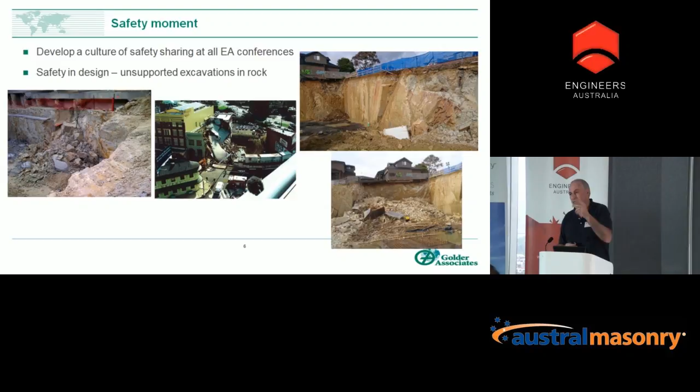So I have to sit here. I prefer to walk around, but I have to sit here because we've got the camera filming. So just forgive me if I get a little bit boring just sitting in the one spot.

The retaining walls are a means of permanently steepening batters, often from something which is stable to something which is unstable. They create a void which things can fall into. Therefore, they form one of the riskiest things we do.

Unlike tunnels, we don't give retaining walls quite often the attention they need. With tunnels, we do a lot of work - it's an open excavation in the ground, there's a lot of engineering. Retaining walls, for some reason, we don't give the same attention, and yet they've got the same risk of failure.

When we design retaining walls, many engineers apply generic soil properties and formulas straight from the codes or straight from a textbook. They don't really think through whether they're applicable to the situation they are in. So I'm asking you to move away from that aspect and start thinking about the ground conditions you're doing the retaining wall for, and what truly are the properties which affect the wall.

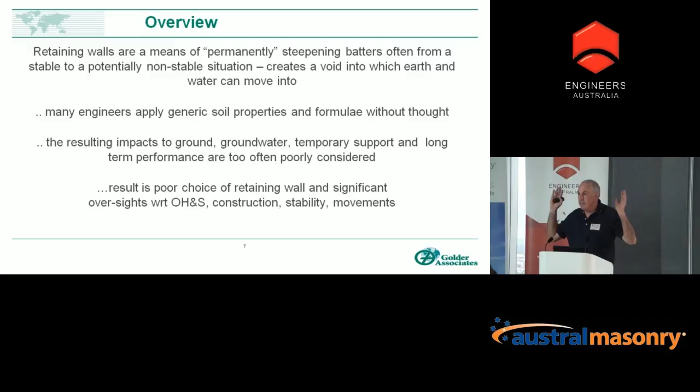When we do a retaining wall, it impacts on the groundwater. We have to think about temporary support and long-term performance. If we don't do this, the retaining wall will not perform for the long term. Most retaining walls are put in to last a lifetime - how many actually last a lifetime? Most of them move, most are under-designed to some extent because we underestimate the ground.

If we don't consider these things properly, we often choose the wrong type of retaining wall. And in doing so, we can often have significant oversights with respect to occupational health and safety, construction in a practical sense, stability, and what movements can be caused.

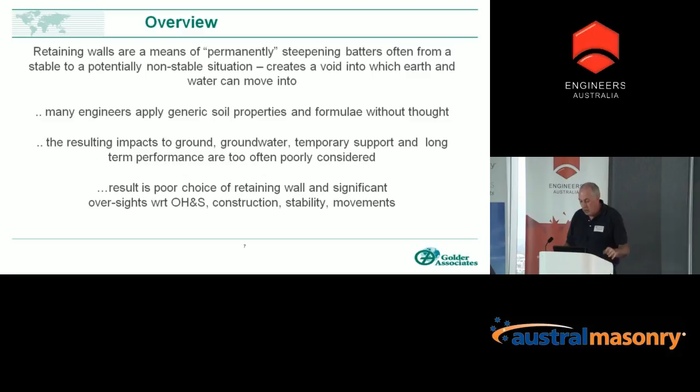One thing we must remember is a retaining wall is much more than a fascia. A retaining wall is not spraying shotcrete up against a wall and hoping it stays there. A retaining wall is a structure which has to support loads which we need to calculate. It's no good just relying on suction in the ground to hold the retaining wall up.

If you're going to design a retaining wall, you need to think about what you are going to do to the ground. If you're going to excavate into a slope for a basement or dig down for a basement, you're going to unload the ground. The ground, when it unloads, has completely different properties than when it loads. Do you consider those? If we fill from an embankment, we're applying load to the ground, so it's a completely different stress path again. So we need to think about the properties we're going to need to simulate the loading case, especially when putting embankments on soft materials.

Both of these applications result in stable ground movements - hopefully they're only stable ground movements - or they can result in failure, which are unstable ground movements. Both of these are considered failure. If you have too much ground movement, or you have failure in an ultimate limit state sense, they are both failures of the retaining wall. It doesn't have to collapse.

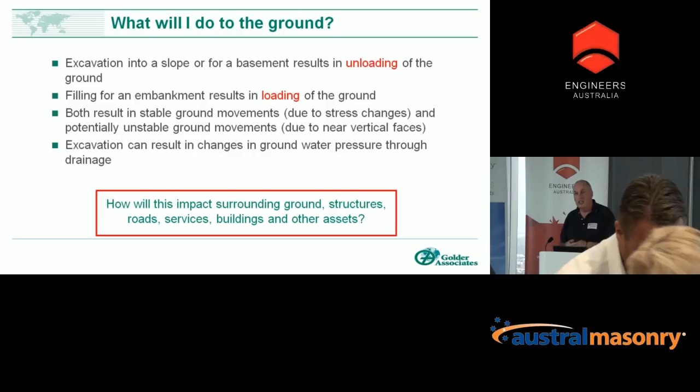The other thing we have to remember is generally excavation can result in a change in the groundwater regime. And as I'll come to later, groundwater is one of the most important aspects of everything we do. I probably wouldn't have a job if it wasn't for groundwater, because our engineering or our task would be so much simpler. And how often do we think about groundwater properly? So I really urge you to...

When we build a retaining wall, how will it impact on the surrounding ground? How will it impact on structures, roads, services, buildings and other assets? And can we build it safely?

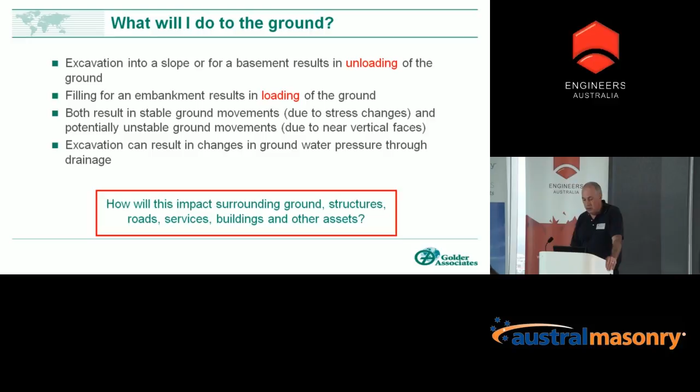So let's just relook at how the ground will respond. You could get wall failure if you don't build it properly. You could get excessive settlement of both the wall and behind the wall. You can get excessive horizontal movement. You can change the groundwater regime. You could get possible piping and liquefaction.

We also have to think about if we're doing an excavation and putting a retention system in the ground and it's got a higher groundwater table - if we lower that groundwater table, that can have ramifications for a long, long way. Especially if you've got an aquifer or something below your retention system, because you're lowering the groundwater pressure, that can affect areas for kilometres around. And we know that only too well in Melbourne - it's happened too many times.

So most of you will know all this. So what do we need to consider?

You obviously need to consider the height of the retained soil, the strength of the ground, the compressibility and stiffness of the ground. How many of you actually think about that? Because that controls movements.

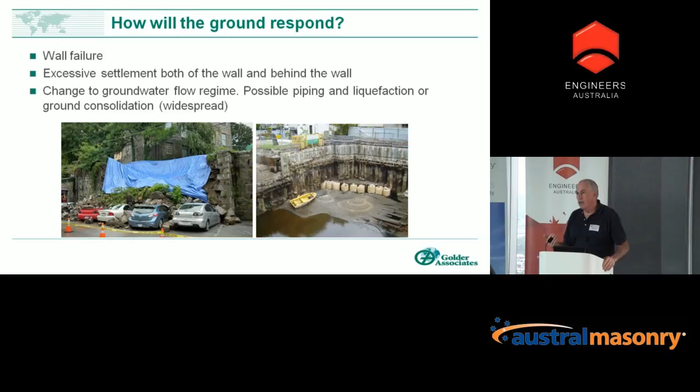The material you're supporting by the retaining wall is engineered fill. So it's got properties which are select for a start, which are reasonably consistent, and you're engineering the product. So, hopefully if you use the right material, the backfill will not change with time.

Groundwater is usually not an issue because you're above the groundwater. Excavations, on the other hand, are much more risky. They're misunderstood and abused simply because too many people rely on suction to hold retaining walls up.

I'll come back to this in a minute. The wall is supporting structure which replaces the ground. So in some stage you may need temporary support until you get that permanent retention structure in, and you need to think about what that temporary support will be.

It's a relatively high-risk construction. Most of the retaining wall failures you will see are from excavation.

The material you're supporting is natural. It's unengineered material. Quite often you don't even know what it is, because how often do you drill a borehole behind the retaining wall? It's usually within the site, not exterior to the site.

So you might not even know what it is. You have to use geology to guess what that material is. Hopefully better than guess, you use logic. And the properties can change with time.

The groundwater is often a major issue because we're digging down into the groundwater system, and you might need to consider such things as water tightness, drainage, discharge.

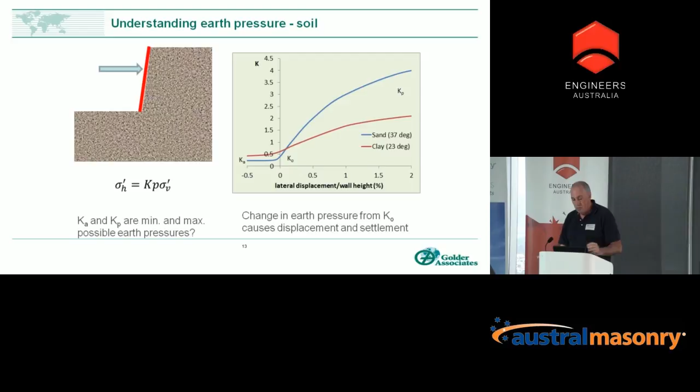Let's have a little bit more look at K0, the pressure at rest. Why is K0 important? Because when I dig a hole, the K0 is what is relieved. In a simplistic case, if you take K0 divided by the modulus of the material in the zone which is moving, you can work out how far the wall is going to move. If we don't know what K0 is, we can't work out displacements.

K0 is not an engineering property. It depends on stress history, geometry, reactivity, and so on. So we have to try and make an estimate of it. We know it has to lie between Ka and Kp.

You're all thinking, but there's those equations relating phi and K0. They are for normally consolidated material, not for over-consolidated materials like we're generally dealing with in these conditions. We can estimate Ka and Kp reasonably accurately for soil, but it's a bit difficult in rock.

When you estimate Ka, it depends on your strength parameters, mainly friction. How many of you actually go out and measure the friction of a soil? And when you do it, how do you do it? There's been so many cases I've seen people use quick undrained tests to measure the friction angle of a soil.

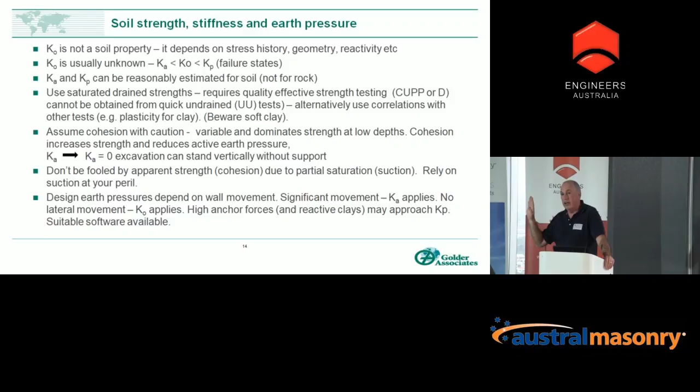If you apply very high active restraint through ground anchors or something to a retaining wall, you could push it up towards Kp. I've seen cases where people worried about ground movement in soft clay set a value of 12H as the earth pressure. 12H in a soft clay, you will fail the clay going the other way. You will actually heave the structure next to you. So in being conservative, you're actually doing damage.

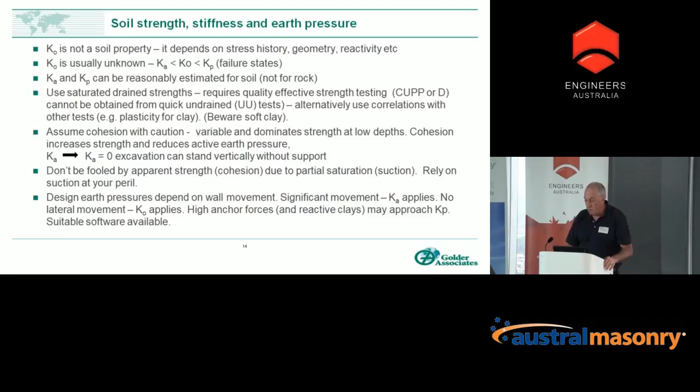So you need to get the horizontal stress about right. And it's a guess—an engineered guess, based on a lot of analysis and so on.

There are two different types of systems. I'm going to talk about passive systems and active systems. A passive system is basically where the retaining wall just sits there and reacts due to weight or some other mechanism. These systems all develop their resistance through displacement, and they will all have displacement equivalent to the loss of in-situ stress, from K0 to Ka.

When we design them, we generally design them for stability only, and we generally design them to resist Ka. You have to be very careful about swelling soils. If you put a retaining wall in swelling soils and the soil wets up, it's going to push the retaining wall. But the maximum force can only be up to the passive resistance or the swelling pressure, and the swelling pressure is usually less than the passive resistance.

You should not use such retaining walls when you're close to sensitive structures, assets or buildings, because you will get movement and can damage them. They are great for embankments, but if you have an excavation, you require a temporary excavation—I'll come back to this in a minute.

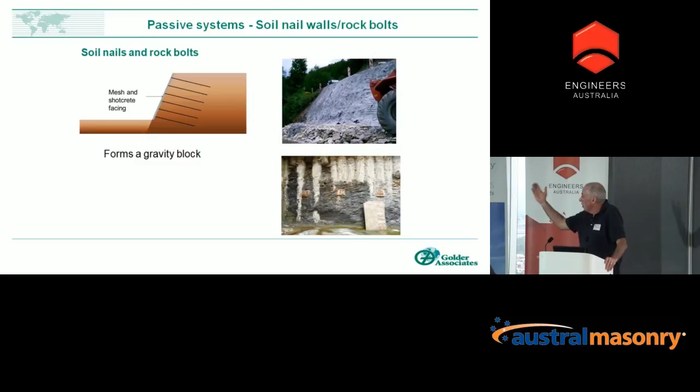Gravity walls you know how to design. You've basically got that block—this is very schematic, as someone picked me up on the other night. You've got an active earth pressure, and you've got base friction generated by the weight of the retaining wall, and you have to resist sliding, overturning, bearing capacity, and structural capacity of the wall.

In doing so, as a rule of thumb, you probably need the width of the base of the retaining wall to be 50 to 60% of the height. You can reduce that down, but you have to design it accordingly. So if you see a really skinny gravity retaining wall, you need to investigate it further.

Quite often the global stability is completely ignored—you need to do a global stability check.

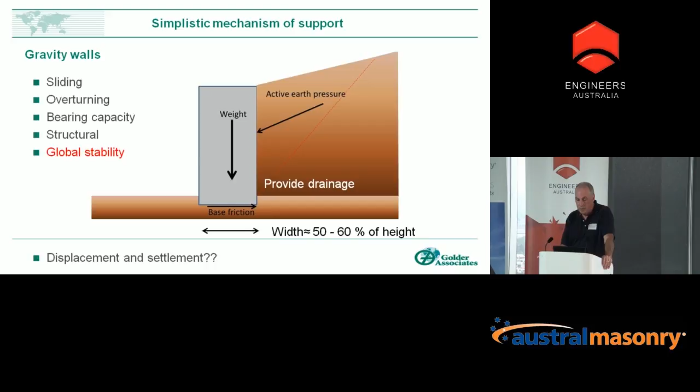Another passive system is the cantilever, non-embedded cantilever wall, which you can use where displacements are not of concern, because you basically have to excavate before you put the wall in. When we go to embedded systems, you put the wall in before you excavate.

But I want to question something. If you look carefully at the photograph on the left, you'll see a worker between that cantilever wall and the excavation. I question the safety of that, and it's time we stamp that type of thing out. Also, there's a house immediately next to that two metre cut—that house would have moved. If that was your house, would you be happy with it? I wouldn't be. So let's stop doing that type of thing.

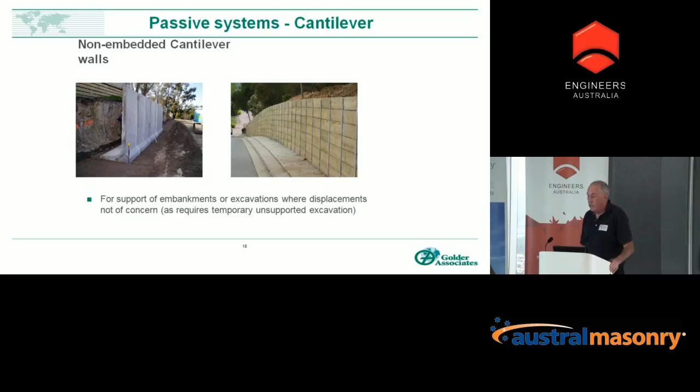Provide the right type of retaining wall for the right position. Embedded cantilever walls are the next system—we put these in before we do the excavation, and then you can excavate down. Obviously, these are full depth.

Some examples shown here are sheet pile walls, and soldier pile walls, where you've got piles at spacing and then shotcrete lagging, which you put in as you go down, but the piles are put in first and provide the main support. As you go into more permeable ground conditions with high groundwater tables, you start talking about secant piles, but the depth to which you can install secant piles depends on the piling method, the ground conditions, and what finish you want, so you need to consider it carefully.

Then you've got the diaphragm wall, which is probably the best type of wall but the most expensive for permeable ground conditions. There are other methods you can use to get the piles in, approaching something like a secant pile wall, but I don't have time to go into that tonight.

The whole idea of these walls is you put them in before you excavate, then excavate, providing protection to the workers and some protection against movement to the services and structures behind. You have to design for it, because these move a fair bit—they're quite flexible, and the pressures are generally close to Ka.

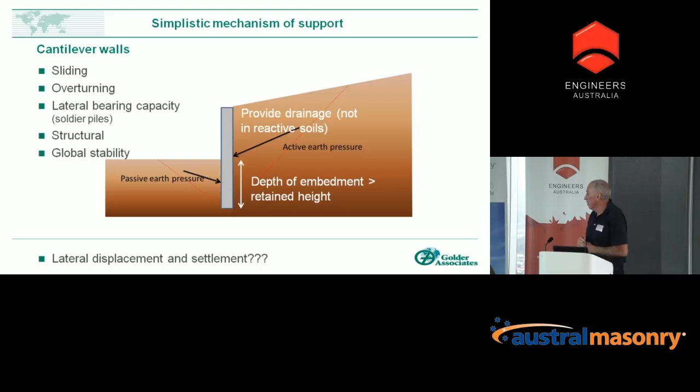Then we move into a whole new system of retaining walls, active retaining walls, where we are actually trying to stop the retaining wall from moving. We do this by using props or anchors generally. We insert the retaining wall into the ground before you excavate, and then as you excavate down, you either put the prop in or you post-tension anchors.

The stability and movement are both important, and you have to design these to limit ground movement. You need to do finite element analysis of these, and you cannot use the AS 4678 Earth Retaining Structures Code. It is not applicable to these walls. You cannot use limit state design for these walls. You have to do your best estimate of the ground properties, and from that get working stresses, working reactions in the piles and so on, and then factor those.

There are some very good publications from CIRIA which deal with this type of thing, but they are all limit state. So be aware that you should not be factoring down properties or factoring up weights or earth pressures or anything else for embedded active retaining walls. It doesn't work. You'll get completely the wrong answer.

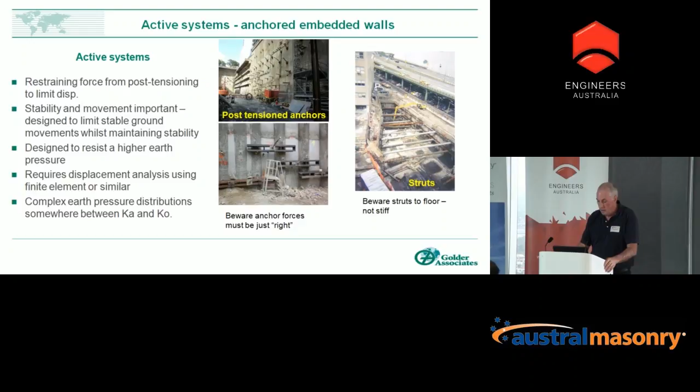And this is much the same type of thing. You still consider the same type of thing. Don't be fooled just because you go and do a finite element analysis. You still need to check individual pile capacity if you're on a soldier pile wall, that the toe doesn't kick out or things like that. You still need to check those things. Just don't believe everything the finite element analysis gives you. There are other aspects you need to check.

One of the things you need to check is the bearing capacity, because you've got anchor forces which are inclined and they're pulling the pile down. I have seen retaining walls fail because they've been pulled into the ground by the anchor forces, they haven't had enough bearing capacity, and that causes the wall to move out.

You've also got to think very carefully about the connection of the anchors to the wall, because if that connection can move, the wall will move out. You need to think about every aspect. Don't let the little details go past without investigating.

We are generally very bad in Australia with respect to anchors. I personally don't think we put them in properly. We don't test them properly. We don't do our QA properly. The most important aspect of this system is the anchors. We need to do better.

So for the structural engineers out there who are doing the drawings, there are very good recommendations within the earth retaining structures guidance about anchors. Enforce them. Make the QA be done. Make the testing be done.

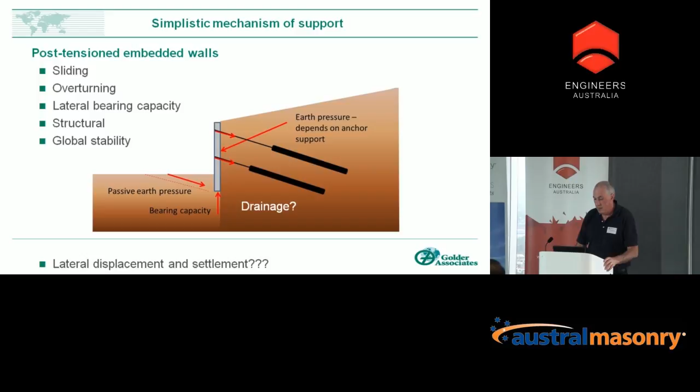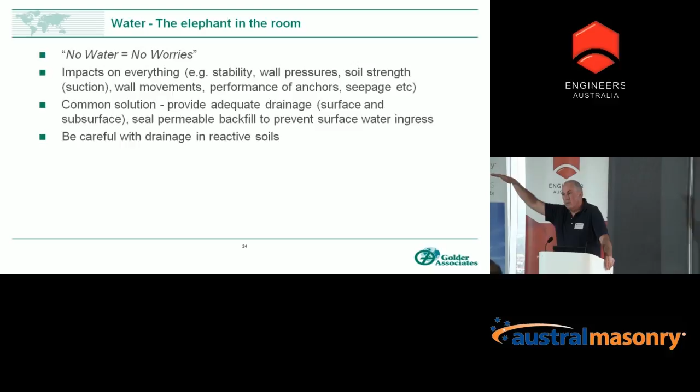Water impacts on everything: the stability, the wall pressures, the soil strengths, the wall movements, the performance of the anchors. If you've got anchors in sand and you get a groundwater level rise because of, say, a broken water main nearby, you halve the strength of the anchor, and therefore the wall moves out.

Do you consider that in design? If you're doing a retaining wall next to a 100-year-old water main, do you think about the possibility that the water main could fail? And should we? Should we consider it a serviceability state or ultimate limit state? Things to think about.

Common solutions are to provide adequate drainage to get rid of the water. How long does that drainage last? How do you design for it? Do you need to provide a system to clean it out?

When you've got a clay material, not much water is going to come through, it's more a pressure relief situation. When you've got sand and flowing water, you need to tank it because you can't deal with the water coming through. When you've got intermediate situations, like weathered fractured rock with water coming along seams, you might have a reasonable amount of water inflow, so you might have to maintain your drainage structure.

What about reactive clays? How many people doing retaining walls in reactive clays put a gravel backfill behind it to act as drainage? Mind you, you're not going to get any water out of the reactive clay because its high plasticity holds it. All you're going to do is introduce water into the ground from the surface, and that's going to cause problems to your retaining wall. So if you're going to do that, you need to seal the top so water can't get in. I've seen houses blown apart by it because of water getting in.

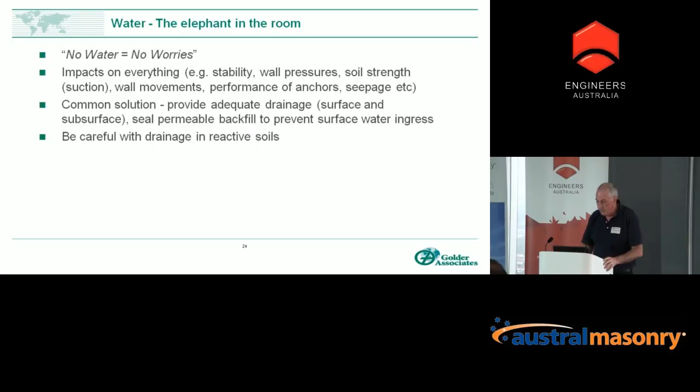So in summary, retention of fill embankments are well suited to passive systems because they're generally away from things. We need to be wary of bearing capacity problems, especially in soft clay. If you put a toe of an embankment next to a service which is in soft clay, you can very easily break that service.

They generally have stable lateral movements, but they're reasonably high, though not usually a concern unless you're close to an existing structure. You must use appropriate backfill materials for the application of the wall, and be aware that you can undercompact it or overcompact it, with ramifications on the behaviour of the wall.

You don't want to be jacking your wall out because you're compacting the hell out of it, or overloading straps in a reinforced wall because you're compacting too hard and overstress your straps. So you've got to be careful. Provide adequate drainage, both surface and subsurface. Bearing capacity, Selma already talked about. And don't forget global stability.

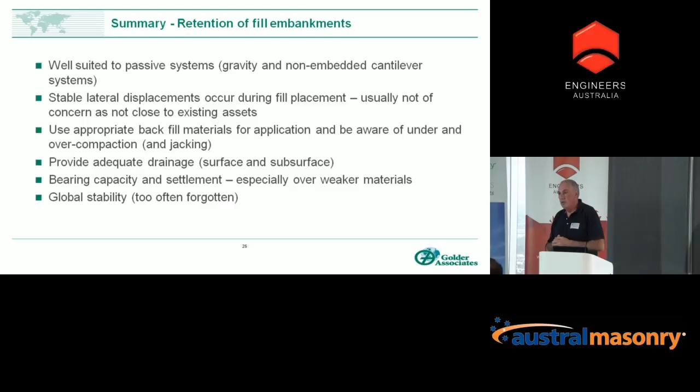Just be aware of how often, as geotechnical engineers, we're asked to do a road widening or railway access widening, cutting into a slope. When you look at the stability of the slope, it's only got a factor of safety, maybe 1.2, and then they ask you to guarantee that the retaining structure has a factor of safety of 1.5. How can you do that if the whole slope has only got a factor of safety of 1.2? So you need to be aware of that, because if the whole slope fails, it's going to take your retaining wall with it.

For excavations, gravity walls, non-embedded cantilever walls, and tilt-up panels, they all require bulk excavation prior to the work. Because you do that, you're going to get potentially unacceptable lateral movements and settlements within the zone of influence. So they are not suited in urban areas where we've got lots of assets around.

The temporary batters are abused. These are general recommendations which most geotechs will put in their reports with respect to batters: 1V to 2H in sand, simply because sand will not stand up any steeper; 1V to 1H in clay, where we're relying on suction in the short term for the clay to stand up at that angle, though over a long term you will get failures in that; and greater than 1V to 1H in rock.

Be very careful about rock, from those first examples I showed you. You need to understand what the bedding's doing. We've had some classic examples in Melbourne where there's been bedding at 20 to 25 degrees, but the friction angle on that bedding has been 10 degrees, and the rock has failed. So don't think that flat bedding at 20 to 25 degrees is necessarily safe. You need to think about it.

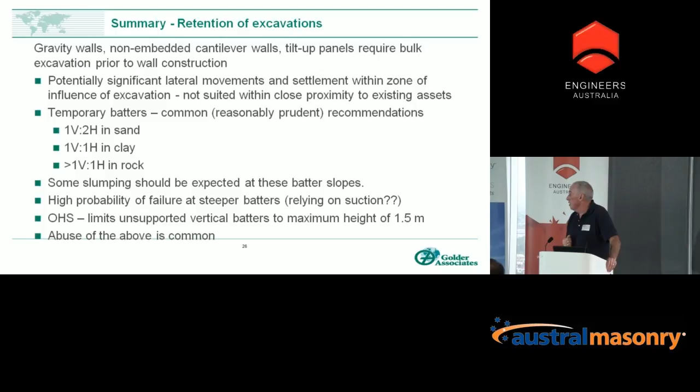At these angles, some slumping should be expected, and you can deal with it as part of the construction. As we get steeper, your probability of failure is going to go up.

Occupational health and safety is important. We're only allowed to stand next to a 1.5 metre deep vertical cut - that's what the Occupational Health and Safety Act says. So how in the hell are you going to build a lot of these retaining walls, which are 10 metres high, with very steep batters? You need to think about it.

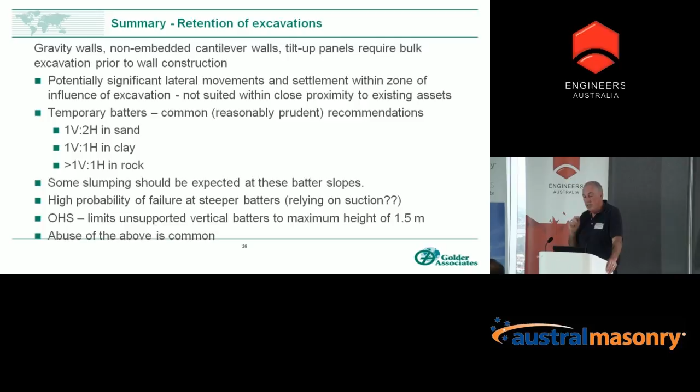So my plea is: when you're doing retaining walls, understand the setting you're in - the geological setting, the hydrological setting, and the urban setting. They're all important. Protect the existing assets at risk. Always check to see what assets are there - you might often not be told.

Choose the correct type of retaining wall and apply prudent engineering. There are a lot of cowboys out there who are willing to take shortcuts. We don't need to be part of those, and I would actually encourage you not to be one of those.

I know we get pressure on us to steepen up batters and so on, but we need to think about safety. It only takes one batter out of 100 to fail and hurt somebody, and you will never ever design a steep batter again, and you'll be in deep trouble.

Excavations and retentions are a risky business. They need to be given due attention. It's not something you give your junior engineers and walk away from - you need to have a review of it.

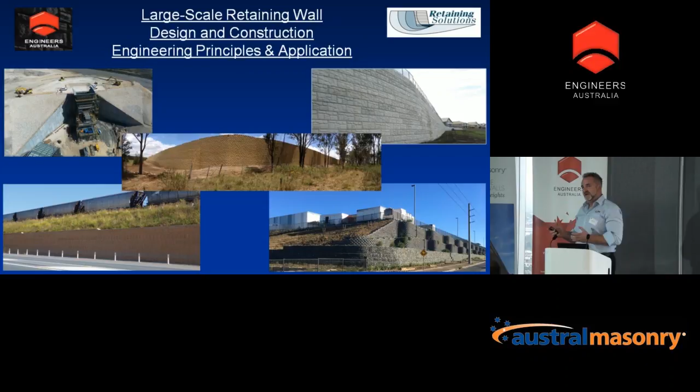The photo shows a few different photos of the types of applications we're talking about. The one on the far left is a mining structure, heavily loaded, typically using reinforced earth panel walls, to a magnum stone wall on the right. In the middle is a traditional keystone frictional connection system. The bottom left is a positive connection system supporting a railway embankment. And there's a hybrid system showing a combination of gabions and keystone in a terraced arrangement to soften up the aesthetic appeal.

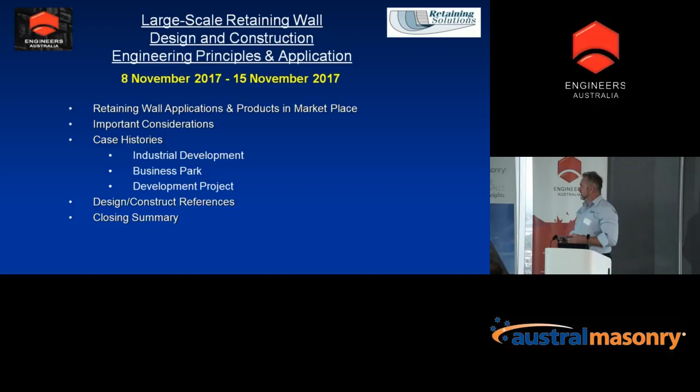So what I'm going to be covering tonight is essentially applications within the marketplace. There's a number of products, and it's becoming more important to be familiar with these products and how they should be used depending on the application, what the actual walls are sitting on, what they're retaining, and most importantly what loads are being applied to that structure over its life. We'll go through important considerations from design through to construction, backfilling processes to look out for, some case issues in terms of industrial development, a business park and development project, some design construct references I've come across which may be useful, and a closing summary.

So the first application is where you're looking at true and piled bridge abutments. We're talking about heavy structures, large structures that can vary from 2 to 30 metres high. Typically you will see panels used in this application, though there are other types of structures. Most importantly, these products are getting loads from 20 to 200 kPa applied on top of these structures, including crash barriers, wheel stops, and quite heavy impact loads.

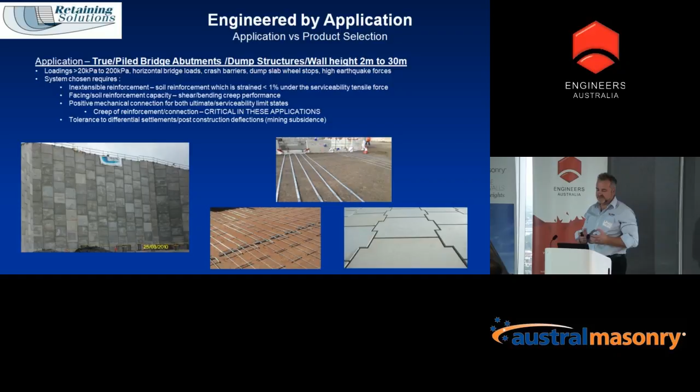You are looking for more of an inextensible reinforcement in this application. You need to look at the combination of that fascia with the soil reinforcement. So typically, what are we talking about with inextensible reinforcement? We're talking about soil reinforcement strained to less than 1% under the serviceability tensile force. You need a high facing in terms of the soil reinforcement capacity as a fascia, how that reinforcement connects to the facing, and how that will perform under heavy and sustained loads - in other words, a positive connection system to that fascia. Creep of the reinforcement is also important in terms of post-construction creep strains.

A lot of these structures move during construction, regardless of whether it's steel reinforcement or geosynthetic reinforcement - they do move, and particularly with regard to tolerances and differential settlement, these are important things that need to be looked at. Road widenings, car park approach ramps up to bridges - again different codes will dictate the type of system you can use in this application. Loadings can be from 5 kPa up to 40 kPa, there may be crash barriers on top, and they can be tied into slab arrangements, taking into account the horizontal force that may be imposed at the top of the wall - important to look at.

Extensible reinforcement typically can be used in this application, from my experience. So again, we're talking about soil reinforcement strained to greater than 1% under the serviceability tensile force. There are a number of different types of facings in the system - you can see there's Vertica, Allanblock, and keystone down the bottom left, along with different types of soil reinforcement. As the engineer, you need to make yourself aware of the types of reinforcement in the marketplace and how they perform over the life of the structure, in terms of temperature effects on the reinforcement depending on the polymer, and also the types of materials you're placing and how that affects that reinforcement long term - and magnum stone down the bottom right in terms of a frictional connection.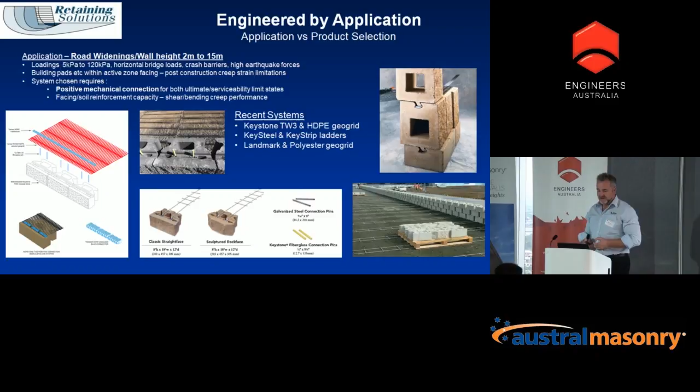There's a lot of different geogrids out there, so you need to ask the right information from those suppliers. Do they have those connection strength curves? When you are looking at alternative systems that come across your desk, you need to make sure they are equivalent, not just in terms of the long-term design strength of the reinforcement, but also how that reinforcement will behave with that facing over time. So that connection strength is particularly important. You need to look into the supplier data sheets to make sure you've got the right information on how it behaves with that facing.

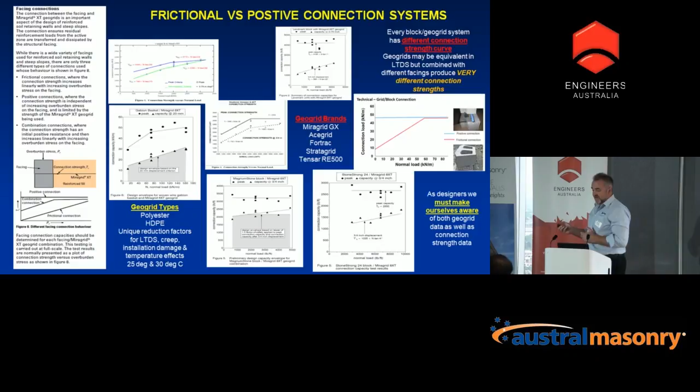Gravity walls - Chris has touched on conventional gravity walls. Again, they're quite familiar with the traditional methods, so crib walls, gabion walls, masonry no-fines concrete walls. There's mass block, lock block, traditional reinforced concrete blockwork walls. New systems we will touch on tonight are magnum stone with extenders - we'll talk about the benefits of that in terms of potential cost savings - stone strong, and post and panel walls, traditional steel I-beams or columns with concrete panels in between, satisfying durability requirements, which is the new inception of that type of product into this application.

You need to be very careful though on the subgrade conditions in which you're designing and building those types of walls. Again, it shows you the traditional gravity wall using concrete or a concrete crib wall, and also using gravity walls in terms of gabions. They need to be laced together the right way and designed as a gravity structure, not as a skin. It's not a fascia.

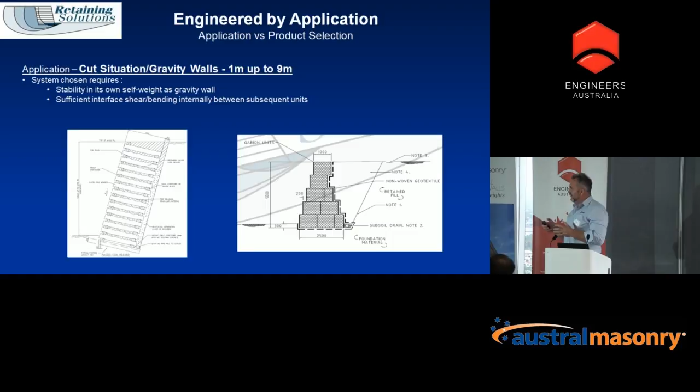Cut situation, again using mass blocks, another system out in the marketplace. It's typically a no-fines concrete unit. There are lifters in there. They create a gravity wall by including a mechanical connection between the no-fines and the fascia by galvanised rods which are mechanically attached to the magnum stone, to the mass block. Again, it creates an effective width as a gravity wall.

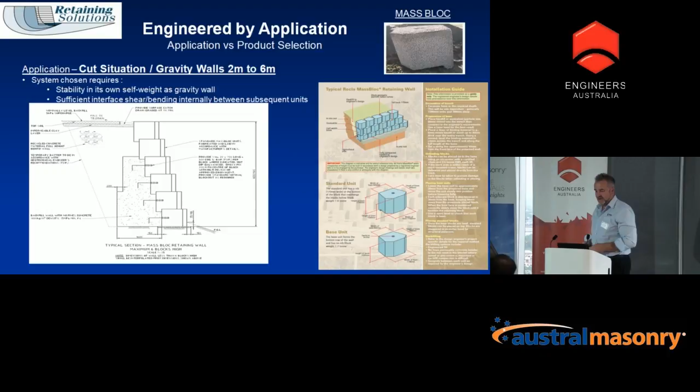No-fines concrete walls are quite a cost-effective or new solution. We've done walls up to 2 metres high using Keystone and no-fines concrete. There are specifications for the placement and the right placement of that material as you're coming up with construction. Above 2 metres high, we've also decided to put in reinforcement to provide a connection between the no-fines and the facing, so it's important that it will also last long term. We've used HDPE, high density polyethylene, in that particular application because of its pH limits - it's actually tolerable to high pHs associated with concrete.

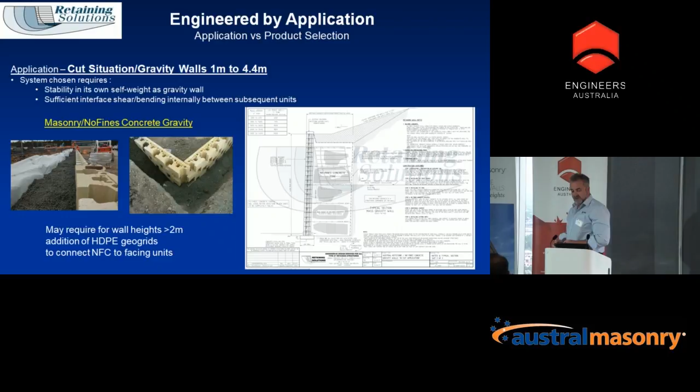In cut and fill situations, you have the opportunity to use a gravity wall, then phase that into a reinforced soil wall in the same structure.

If it's a gabion wall, you can use different types of reinforcement between the gabions. That shows you a Paralink product, again a polyester reinforcement. You need to get the data to assess that as a solution, so you're not looking purely at global stability or sliding and overturning of that mass, but also internal stability.

Or what they call a local equilibrium method, how that performs under vertical load in terms of pull out of that reinforcement. Magnum Stone, another product, a different fascia, again same principles need to be looked at. You can use it as a gravity wall, also uses a frictional connection where the reinforcement just sits in between the blocks and relies on a gravel interlock to hold that in at a vertical load, or a positive connection system that will actually go through the cores of the block and come back and extend into the fill. They've also used it with anchors and other different types of reinforcement attached to a cut. Not familiar with that application, but you need to look at how that will perform in relation to the wall.

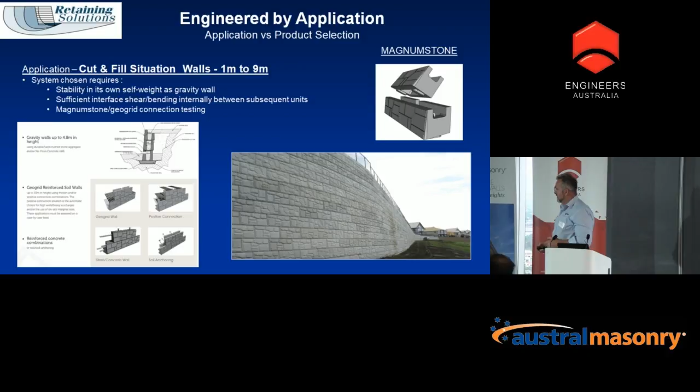Gravity walls, in terms of using extenders, you're looking at a concrete crib wall or a gabion wall using extenders. You can use a 2 foot or 4 foot, creates a series of silos, you're filling up with aggregate. The cost savings versus using no fines concrete, there's a big cost difference here, so it needs to be assessed.

Again, stability of cuts, you can see that cut's quite steep. You need to be very careful about the geotechnical considerations in terms of temporary support and the risk you've got in relation to the workers.

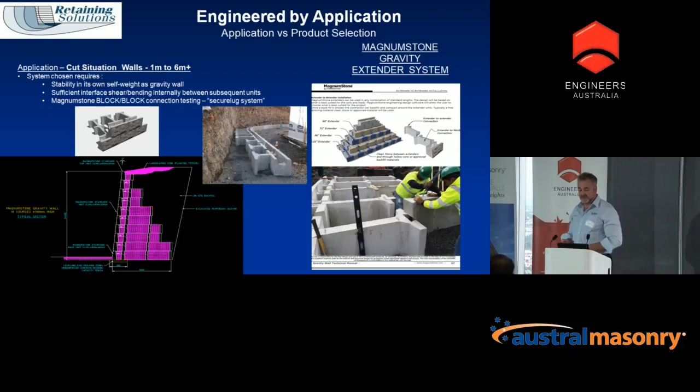Stone Strong, another large block system. Same thing, can be used as a gravity wall, also be used as a reinforced soil wall. Again, you need to get the same information regarding the soil reinforced and the way it's connected to that type of fascia.

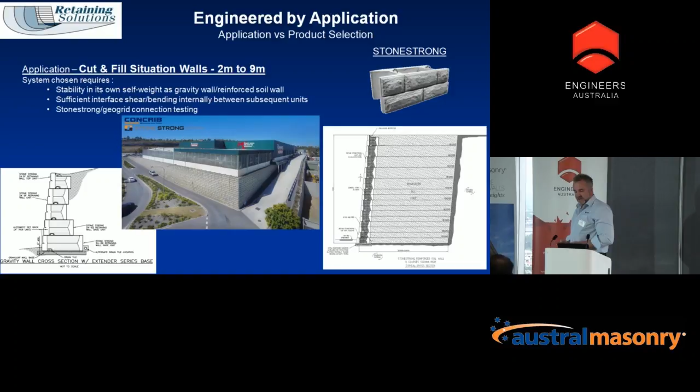In terms of considerations, Chris touched on the most important - geotechnical. You need that geotechnical information to make sure your design is going to work short term and long term. So there's design loads, information, performance criteria, the aesthetics. Sometimes the application and the site you've got may dictate the type of solution you're going to use for that application.

Foundation preparation is paramount to the performance of the wall. We'll go through backfill placement and compaction, how important it is in relation to the movements of that wall as you come up, and also performance. Soil reinforcement, how it should be laid level and compacted.

Drainage provisions, and under the standards there are a few different options. Again, you need to be very careful in regards to reactive soils - you don't want to encourage water to come into the structure. Monitoring at times, and most importantly, maintenance.

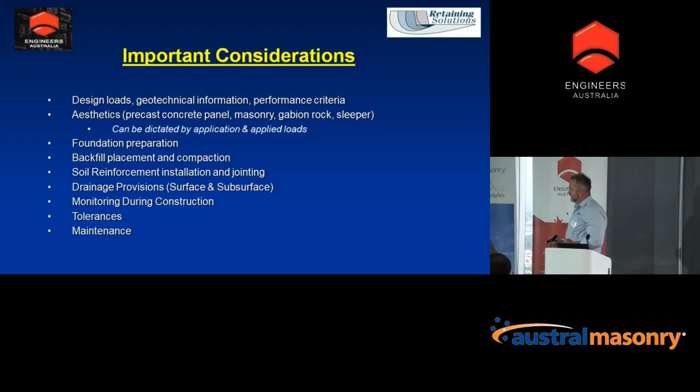Just briefly touching on, you've got to look at the geometry of the wall - what's above the wall in terms of batters, what's below the wall. Your foundation capacity in terms of settlement and bearing capacity. Dead and live loads - if you've got heavy loads in the face, you need to think about whether you need a positive connection system, or extensible reinforcement.

These are things that need to be looked at in terms of that performance criteria for that application. So it shows you that in terms of strip loads and those sort of things, they need to be looked at in relation to the facing if it's within the active zone.

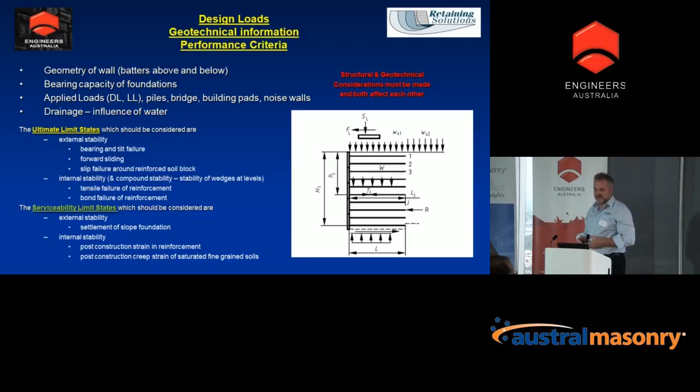Ultimate limit states - we're looking at external stability, so bearing capacity, sliding, overall global stability. Serviceability limit state - settlement of the structure in relation to that foundation which you're placing that retaining structure on. Internal stability - we're looking at post-construction strain in the reinforcement.

You need to be very careful regarding using fine-grained soils, particularly when you're reworking them. Foundation preparation is paramount to the performance of any wall, so you need to look at differential settlement in terms of the capacity for those imposed loads. Again, soft spots need to be replaced with engineered fill and compacted.

You need to make sure how that's going to affect water ingress and how you can actually place that foundation to meet that bearing capacity requirement. That shows you a photo there, and that was actually an application where there was a 16 metre high reinforced earth wall in a mining application.

We were lucky enough to find an artesian spring coming up underneath that area, so we had to dig down 4 metres and replace that whole area with a raft, as there was constantly water coming in there. The wet and dry strengths of that material we put in that hole was critical in terms of the way it was going to meet bearing capacity and also settlement of that wall. Again, every application will dictate a certain treatment.

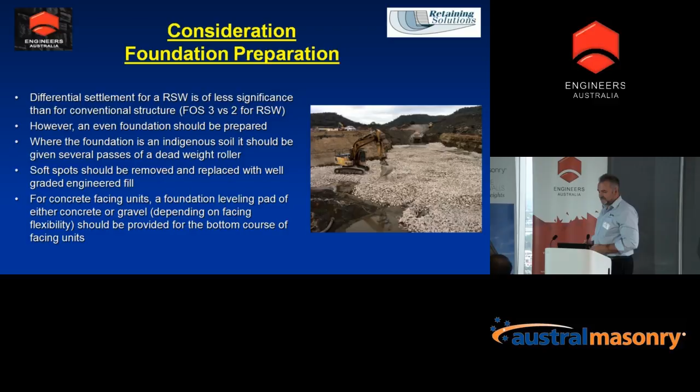Backfill, there's a variety of different types of backfill you can use. Our experience is the backfill material used within that reinforced fill zone needs to be a granular and non-expansive material, and most importantly, it's got to meet the requirements the engineer's designed for. So you don't want to design an optimistic friction angle, you want backup in terms of testing. If you're looking at peak or constant volume friction angles, there needs to be testing, ITPs, and close out of different hold points from the design process through the construction process. Most importantly, backfill is the key to the performance of these walls. Use poor quality material, and you'll probably have excessive movements and poor performance of the wall.

Again, it needs to be durable. You need to assess that material in terms of how it's going to affect the long-term performance of that reinforcement, in terms of strength and also damage on the reinforcement as you're building the wall. There's a cross in that photo, basically saying that from past experience, you do not use shale, claystones, or mudstone, because as soon as you recompact it and wet it up, you're lowering the strength of the material again. So stay away from those types of materials.

Backfill considerations in terms of physical and electrochemical criteria - there are specific requirements whether you're using a steel inextensible reinforcement or a geosynthetic extensible. Again, sizing the material, there are different guidelines, 150mm minus for steel reinforcement down to 75mm for geosynthetic. You need to also be very careful of your placement method, typically a third maximum size of the maximum lift thickness, so typically materials you'll be using are 50mm to 75mm grading size down.

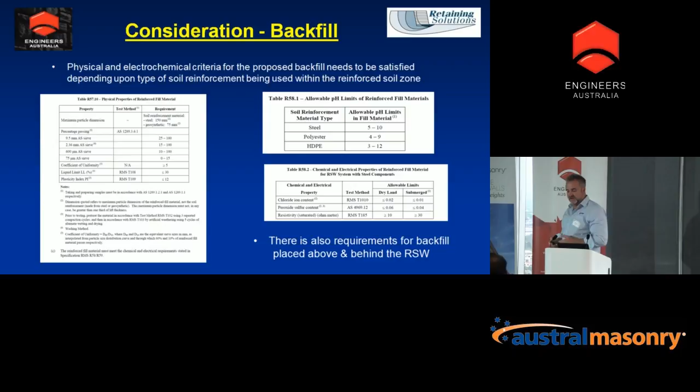So spreading and compaction - regardless of whether you're using a panel wall or a segmental wall, it's particularly important that your compaction processes are closely monitored during construction. Also the moisture content of the material - are you placing it dry of optimum? You need to be very careful how that moisture content will affect performance as you put those layers out. It will affect the integrity of the structure and your processes. Direction should be parallel to the wall, not perpendicular, otherwise you'll end up pushing out the reinforcement and causing excessive deformation on the facing.

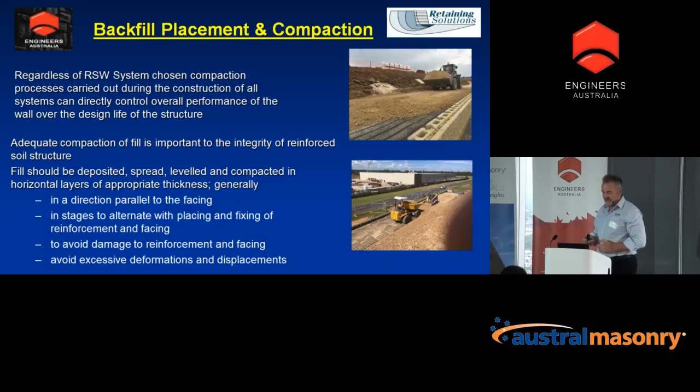Again, with stage construction you want to avoid damage. You need to make sure whatever process you've got, the rubber tyred equipment - regardless of whether it's steel or geosynthetic - you need a layer of fill over the material as you're spreading and compacting. Again, you want to avoid excessive deformations and displacements.

This is probably an important photo we've taken in relation to a wall we've built, also segmental walls. So we've got two different types of systems, both segmental units, one bigger than the other. One has a positive connection with the steel reinforcement, the other can be used with different types of geosynthetics using a positive connector and also frictional. Again, there are different zones - within 1.5 metres, typically called a hand compaction zone, you're using equipment less than a tonne, so jumping jacks, compaction equipment.

Again, control methods to get your target density within 1.5 metres of the wall. Past 1.5 metres of the wall, you can use heavier equipment, with control processes. When you move into a segmental wall, we'll go through the system, whether it's a frictional or a mechanical connection on a segmental wall. Again, you need to compact the gravel within the cores of those units, the first 300mm, extending back to 1.5 metres.

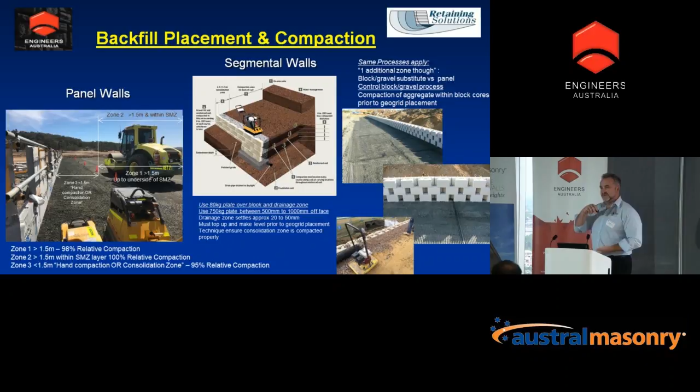Again, it's critical in terms of how the reinforcement creates that gravel interlock which holds that reinforcement if you're looking at a frictional system. So it shows there an 80 kilo plate. Again, you will see the material drop down. Once you run an 80 kilo plate along the back of the blocks, you'll see the aggregate sink down.

That's what creates a gravel interlock and how they test these different types of fascias with the geosynthetic between there. That shows you a snapshot. A lot of this isn't talked about, but everyone says there's connection strength curves in these software programs. The way they test that in the laboratory, that shows you. They actually hand compact the material within the voids to fill all the voids, they put the geosynthetic in between the two blocks, put another block on top, fill that again, then apply a vertical load. Then, under vertical load, they also measure the deformation of the geosynthetic at the back of the unit, so you'll create a strength curve under a peak in the serviceability criteria in terms of movement.

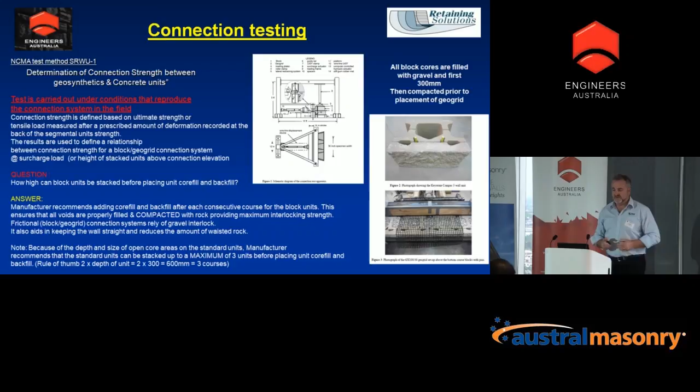So it's particularly important when you're building in the field, as designers, to make sure when they're building the walls they're creating the same scenario as what you actually designed. So compaction of that gravel material as you come up, not allowing people to multi-rack, which is a fast way of building a wall, and you don't want to put scaffolding in the front of these types of walls. Why I've come across this is probably an important thing to drill in as engineers.

These are some of the practices that are occurring. So they'll multi-rack the walls, obviously to avoid putting a scaffold up to build it faster. Are we actually constructing it the way it's been designed? No, you're not. So multi-racking, you see the problems there. The main key, obviously, you're not getting adequate compaction within the cores. So that gravel interlock we've talked about, when you're relying on just purely friction, you're relying on overburden of those blocks, that's what creates a gravel interlock. So that's not compacted, you are not resembling anywhere near to what your design strength curve is.

So poor compaction again within that zone. You'll see down the bottom there, the actual geosynthetic drops down and goes up. The amount of additional load and stress you're putting in that reinforcement at the connection, it's regardless of whether you've got a steel reinforcement or a polyester reinforcement or HDPE. You need to make sure those processes are backfilled up to the top of that block and you're filled up in each consecutive lift. So these are things to look out for that don't happen on site.

You want to make sure that it's actually being constructed the way you've designed it if you are taking responsibility for the design. The last thing you want is cracks at the back of the pavements there, purely where you haven't been doing the hand compaction or consolidation zone the right way.

So it shows you there's some photos there of the reinforcement placement, and then to level with the unit, whether it's a block unit or a panel unit. You have to get the material up to the actual connection where a steel strip actually connects to a panel. Same thing, you're putting additional load on the connection, but you've got a positive connection. So if you don't get that gravel interlock and compaction with a segmental unit, you're dramatically losing your connection strength, and you essentially will be relying on the connector to provide that strength.

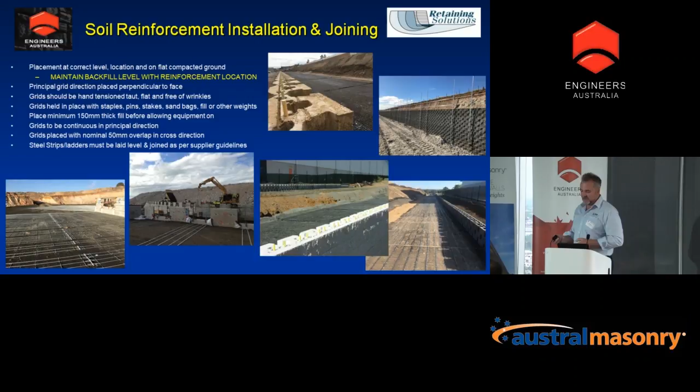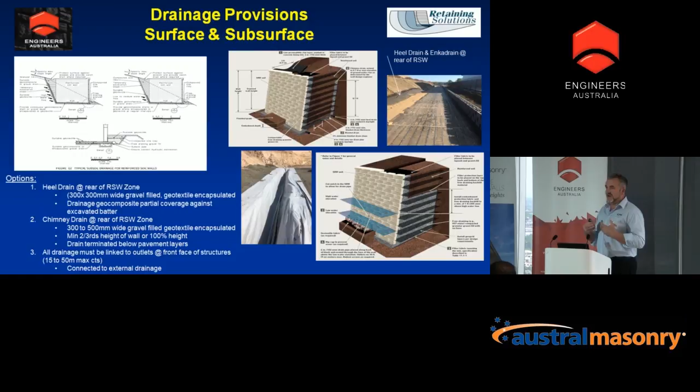You can see in the middle there a gravel chimney drain, full height, 100% coverage, typically a gravel trench with geotextile on both sides. You may wish to do a heel drain at the back of the wall and incorporate a geocomposite product from one of the suppliers. You need to look at the flow rate you're getting and what it will capture, to make sure water gets away from the structure and doesn't pond at the bottom, which would create a loss of strength in the foundation.

Monitoring during construction is the most important thing with any type of segmental wall. A lot of the smaller units have their own pins as a spacing and alignment tool, but you still need to gravel fill them, compact, and use a string line. There are examples here whether it's a panel wall or a segmental wall. Panel walls move, so every lift you put in, that panel will move in relation to the next one, so you need to monitor as you come up.

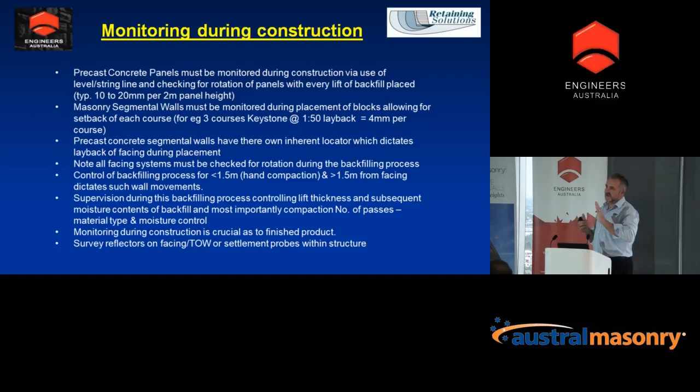Magnum Stone has a secure lug system on the bottom of it. You still need to make sure the wall is brought up line and level as you come up. So again, supervision - you may also put survey reflectors on the front of the wall as you come up.

Tolerances - a lot of specifications will dictate tolerance. It would be a good idea as a structural or geotechnical engineer to specify what tolerance you'd like to achieve, so things are monitored during construction to avoid problems later on.

Plus or minus 50 mil for the reinforcement connection where it connects to the facing. Design inclination of the face - typically 1 to 2 degrees of movement. Another way of looking at it is plus or minus 50 mil of the design position. Again, monitoring hold points during construction is critical to the performance of these walls.

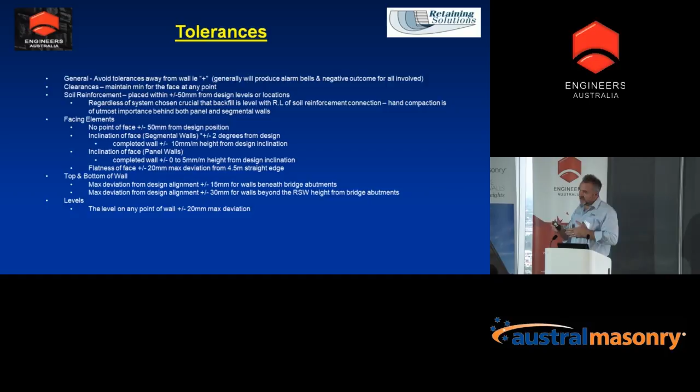Flatness of the wall - one check is plus or minus 20 mil on a 4.5 metre straight edge, typically more for panel walls where you'll see shouldering. If you monitor tightly during construction, you'll avoid those problems long term. And RLs in terms of finishing levels - again, there are different tolerances in different specifications.

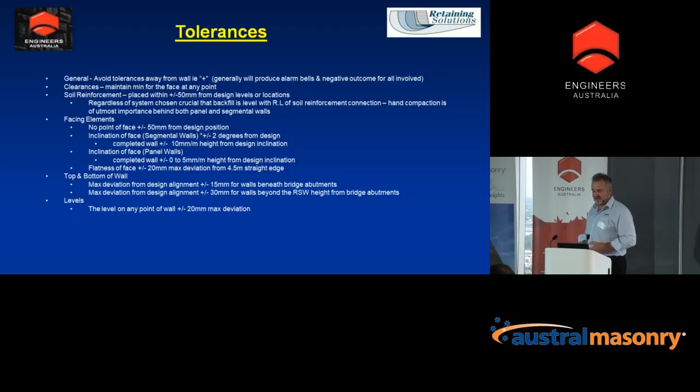Maintenance, again, needs a regular program. A lot of the problems we've seen with retaining walls long term relate to how the batters are finished around the walls, and whether there's been protection on the batters to stop water coming down the back and creating a problem. So spill-through batters at the end of walls - have you thought about that? When you get rainfall you get scarring down the back of the walls, dish drains - all these things actually prevent maintenance problems long term.

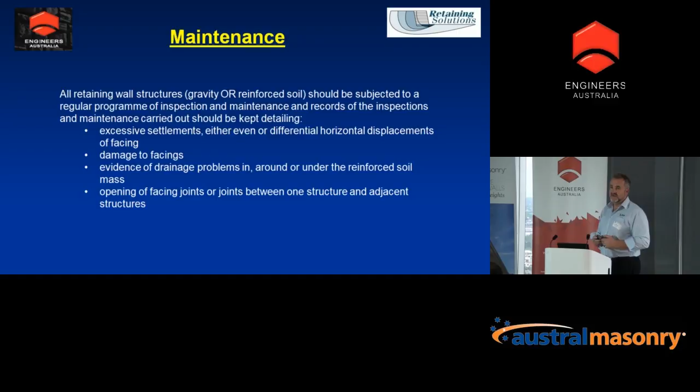When you look at walls that have suffered distortion or displacement, you'll get panels out of whack, damage to facing, but again drainage is the main key thing with regards to finishing these walls off. It's the last 10% of effort in sealing that structure that will affect the performance.

There are a few case studies here we'll go through, covering what was used in a few industrial developments. One particular first application is a soil nail wall, which was originally specified, with a noise wall on top that had to be constructed top-down. So the design loadings on that type of application were fairly important. There was also a reinforced soil wall using a frictional connection, typical for pavement up to 4.5 to 5 metres high, and a soil nail wall up to 13 metres high with a reinforced soil wall above.

Now, this particular project, we looked at using the Keystone TW3 system. Again, the key to the success of this whole solution was the stability of that embankment.

So rather than using a top-down construction, we proposed an equivalent gravity wall, which would have the strength not only to take the noise wall loadings, but also be able to cope with wall heights up to 13 metres high. And we're using, again, a good granular material.

The batters was key to the success of this job in terms of opening up different sections and monitoring that cut as we went along. It was bedrock, and again, the top couple of metres was exposed.

Didn't require nailing, but monitoring by the geotechnical engineers was critical, opening up in stages as we went along. The first wall was about 760 odd metres long, got up to about 7.8 metres high. We installed sleeves during construction within the reinforced fill zone, and used a positive connection system looking at those wind loadings and how that would affect the top 2 metres of the wall.

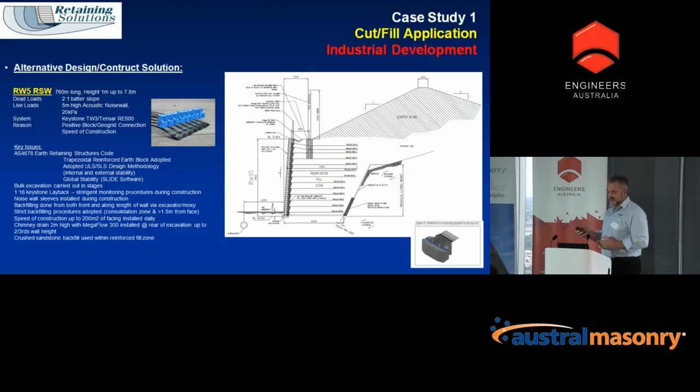Some noise wall posts were installed, and again, sleeves were installed during construction. Compaction, very important around those sleeves, was about 2 metres off the rear face of the units.

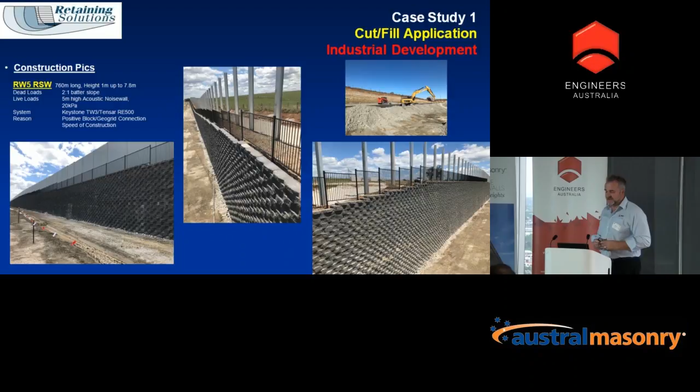Another wall on that same site just shows you about 460 metres long. Wall heights vary from 1 up to 13 metres. Connection strength, positive connection system, paramount in that type of situation due to the wall heights and the loadings on the wall. Same checks were made as the previous wall we just discussed in terms of internal stability, external stability.

Again, in this case, you'll see we used a step or trapezoidal block because we were retaining a rock excavation. So to limit the amount of excavation, we were also controlled by boundaries at the back.

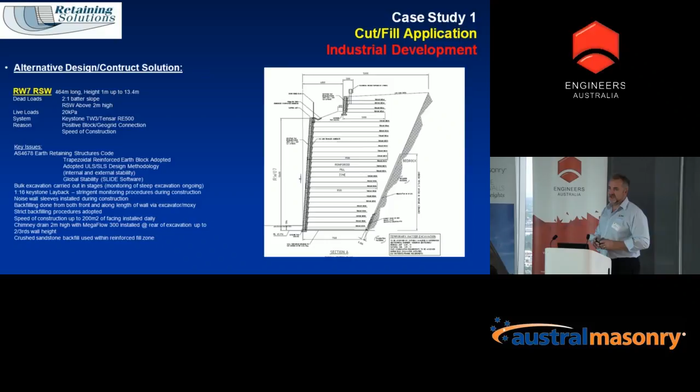So we worked very closely with ATNL, one of the principal consultants, as well as PSM Geotechnical, to check not only the performance of the wall, but also the tolerances we had in terms of batters and opening up excavations, and the like. So that shows you some photos.

We used, in this case, a chimney drain at the back. So it was a 2 metre high gravel drain against the cut, and we used Megaflow at different orientations along the back cut to intercept the water.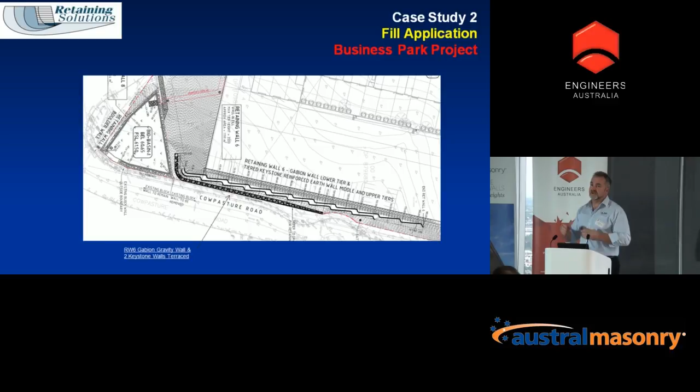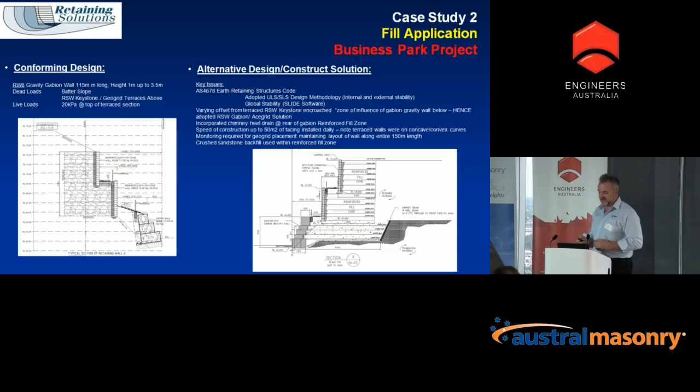Again, the same checks were made: global stability, internal, sliding, drainage. Particularly important to make sure we captured the water at the back to make sure it got away from the structure. So it shows you some photos of the geosynthetic laid out for the Gabion wall at the base, and the two keystone terrace walls were behind.

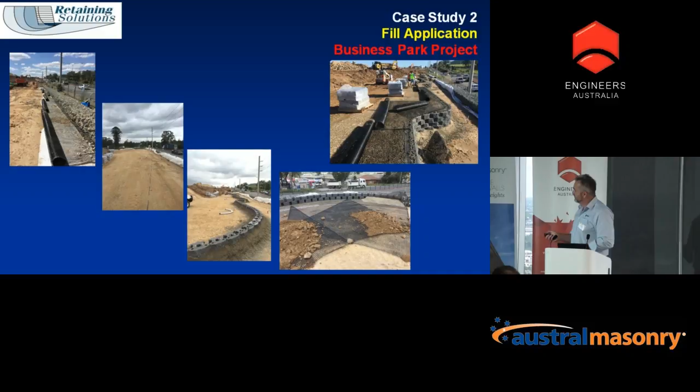It was on a curve, not as fast as a traditional straight wall. Important that the reinforcements placed a certain way and the backfill spread and compacted as you come up, to make sure it's got coverage between each layer. That shows you a completed photo just showing the Gabion solution.

There were also bioretention basins at the base of that Gabion wall. Global stability was a concern there. We also used that reinforcement to satisfy the criteria in relation to the batter at the back.

The last case study was just to show you the application of using Magnumstone with geosynthetic as a reinforced soil wall, and also as a cut wall at the back as a gravity wall. Extenders weren't used here, but it shows the same processes with using a segmental wall, using keystone or panels. Reinforcements laid, gravel actually filled within the cores, that's compacted, geogrids placed, another unit put on top.

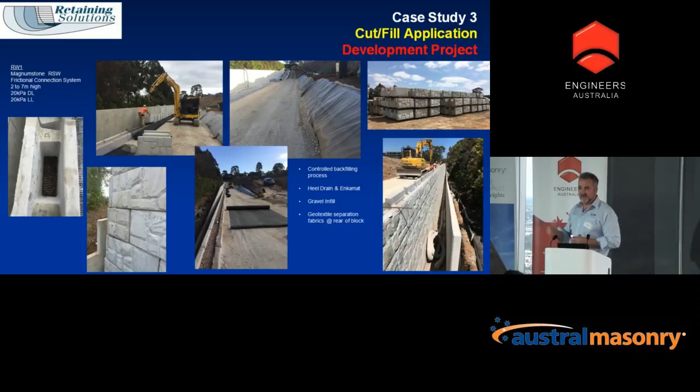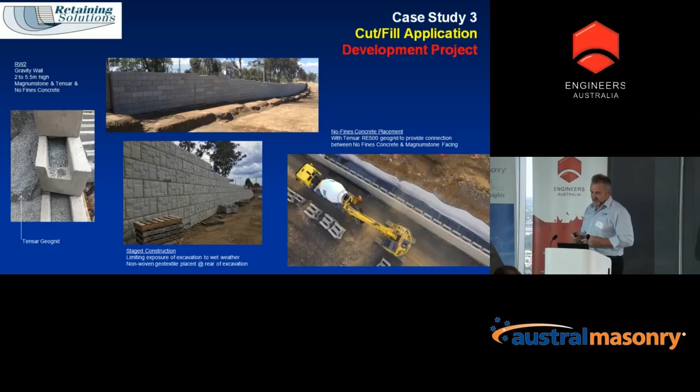Cut application at the back of the site. Walls varied up to about 5.5 metres high. We used Magnumstone with no fines. Extenders weren't around at that point in time, but we used Tensar as a connection between the no fines and the fascia. Particularly important - next time we'd obviously look at using extenders purely to offset that cost of no fines concrete.

Again, most important is what sort of material you're putting behind that gravity wall as you come up, and also that it's free draining. You may also utilise some cross drains to make sure water does get out. It's on a reinforced concrete foundation, and you must look at your bearing capacity to see what type of footing you're going to be using.

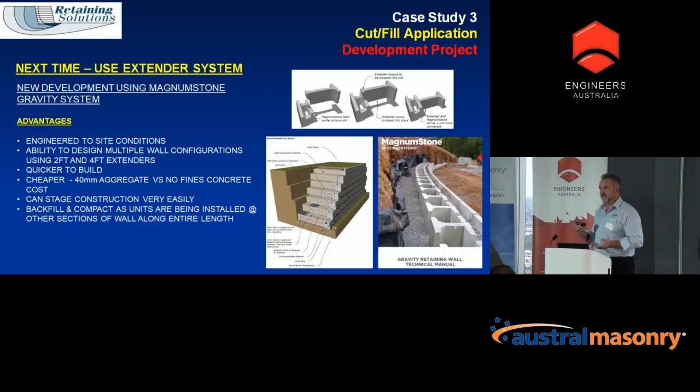And in closing, with all these walls, the most important thing is geotechnical information. Doing design and construct, a lot of the risk has been shed onto the guys doing that component, so it's really important to make sure you have the right information geotechnically in terms of the type of wall you're going to build. There's a lot of different products out there you can use for these applications. You need to choose the right product. Sometimes your design requirements will dictate the type of product you use.

Identify the application in terms of the structure and the loads imposed on the wall. The geotechnical considerations will dictate the type of wall, the dead and live loads, global stability, settlement and drainage - those are the most important things to look at with these types of walls. Once you've chosen that, you may go back to the drawing board, as your client may have dollar considerations to look at. So there's quite a few different points. Once you've addressed all those, hopefully you will come up with the right application and the right product to use.

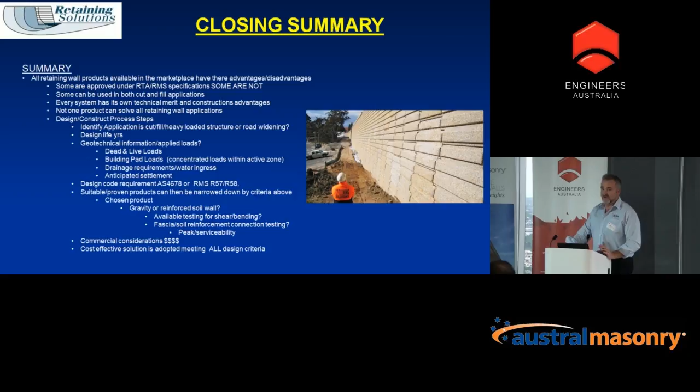And thanks for your time.